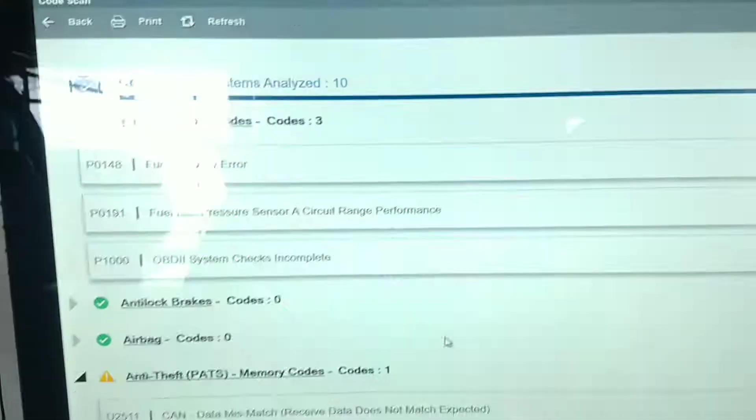What we're working on today is an '08 Ford F-250, big old work truck, and it came in with an MIL, and the customer said it lacks power. You step on it, it just falls on its face. They ran the codes, they come up with these. So what he did is he put in the fuel rail pressure sensor new, and it didn't affect it.

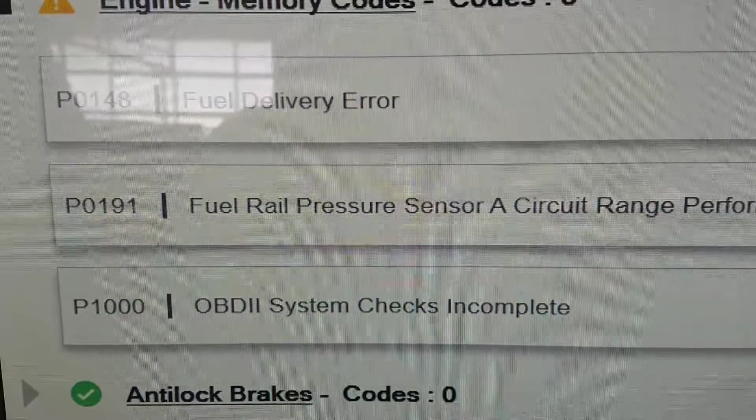Well, I told him there's two other things that it can be on this thing. It has a fuel pump driver module and the fuel pump, one of the two. Since he's already done the rail sensor, either one of them could be a possibility, but I'm leaning towards the driver module. Usually when those go out on these trucks, it just dies. It's dead, and then there's nothing you can do.

But occasionally you get them to where the fuel pump just will not raise its pressure. Instead of having a fuel pressure regulator like they used to, they have a driver module which undulates the voltage up and down, and that's how they regulate the pressure, by reducing voltage to the motor, which years ago, if you did that, you burned up the pump. But somehow that works now.

I think I've only put one of these pumps in. I mean, they very rarely fail anymore. But I put several of these drivers in because on this truck, there it is. Who would think that something mounted out there in the environment like that might give trouble?

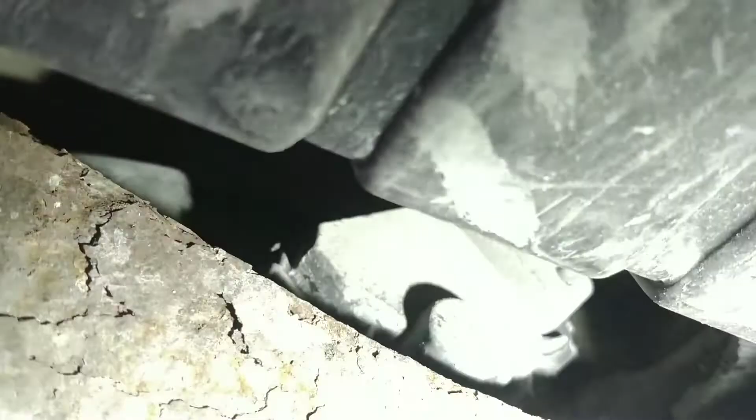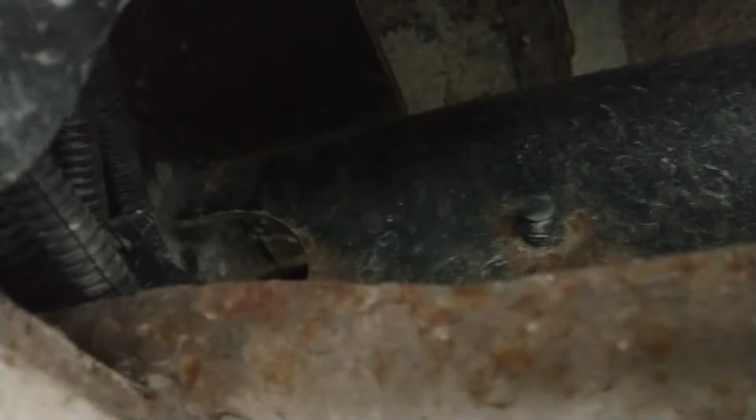Now, on the ones that are just a little bit older, this is an '08, the like '04, '05, '06, they had a bar going across about right here, a round tube, and they had it mounted there, and it would get road salt and junk and stuff underneath of it because the pipe that it was mounted on was round, and it'd pack it in underneath of it, and that stuff would get nasty and everything.

And the aluminum back on that sensor, the junk would build up behind it, and it would start to rust on the metal, it would start to corrode on the aluminum, and it'd just spread out and break the module in half. Have not worked on one like this yet. This will be a first. But I can see back in there, it's still got the aluminum back. It's mounted against steel. I'm going to assume that they have the same trouble.

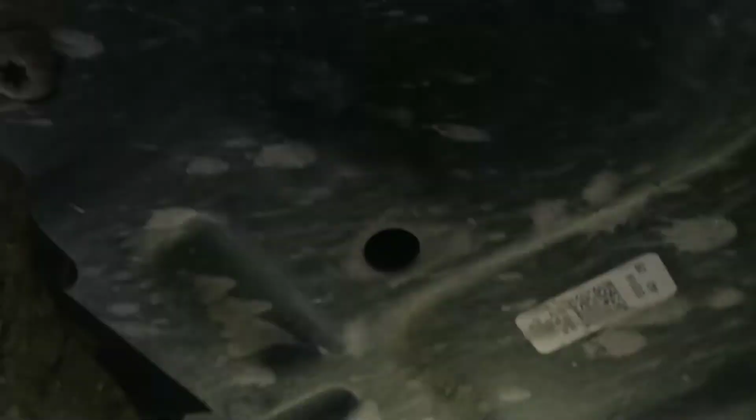Of course, this one has the EVAP canister and everything mounted right in the way. But at least the spare tire is gone. It's mounted on the roof. So we're going to do a little bit of investigation, diagnostic, and get back.

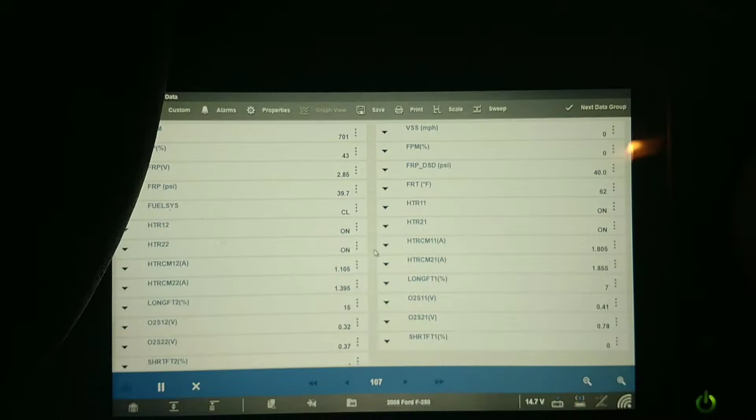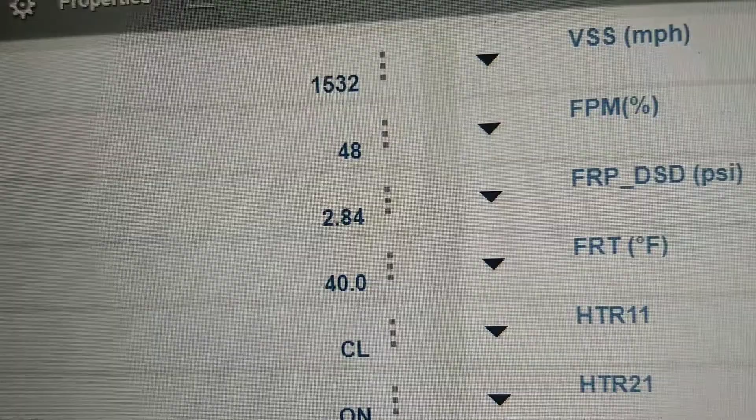Alright, we're in here. Got the data stream loaded up. Right there's the fuel pump rail pressure in PSI. I got it under load right now. I'm going to torque it up a little bit. It is not going up. So we'll see if there's any kind of response out of that module.

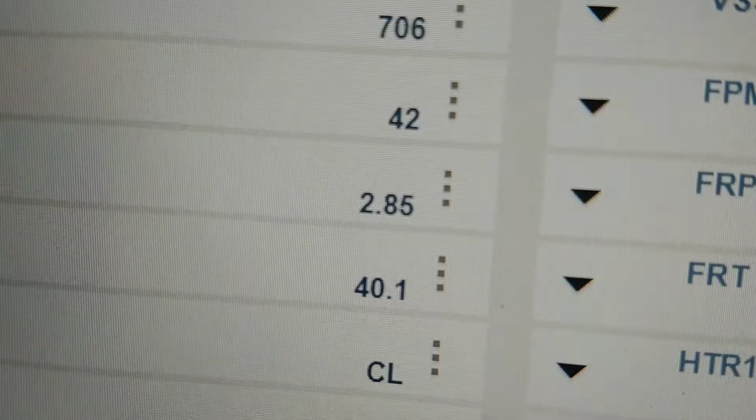Alright. Amazingly, I'm able to get my hand up in there enough to get it unhooked. Go up in here and you can reach over top of the plug-in and depress the deal, and I got my pry bar hooked across the corner here and just sat there and wiggled. I got it slid off a little bit, and I just worked the plug-in off.

Got stuff behind it. It's a tight fit. There we go. And there's enough wire to get it out. All right, now I can see stuff. Get my four eyes here, six eyes, however many. Okay.

I think this wire here is the power wire. And what we're going to do is eliminate the computer. We're going to take the power wire here and jump it to the power wire going to the pump, which should be right next to it, I think. I'm going to double check. I got a picture of it in my phone, so.

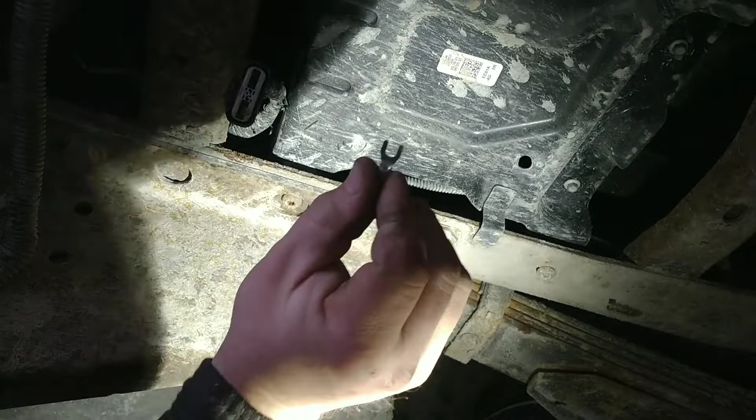But these deals right here are perfect to just plug in and jump them things over. So we'll fire this thing up and see if the fuel pressure maxes out, and take it out and drive it and see if the fuel pressure drops.

Just for reference, I'm going to show you what the fuel pressure did on the test drive the first time. Running along 40, stepped on it a little bit, dropped to 30, let out of it, cruised, and stepped on it hard, dropped down to 18. I'm going to run it around here real quick and see what it does this time. At idle right here, fuel pressure is running about 58, 57.2. Let's put a load on it, see what it does.

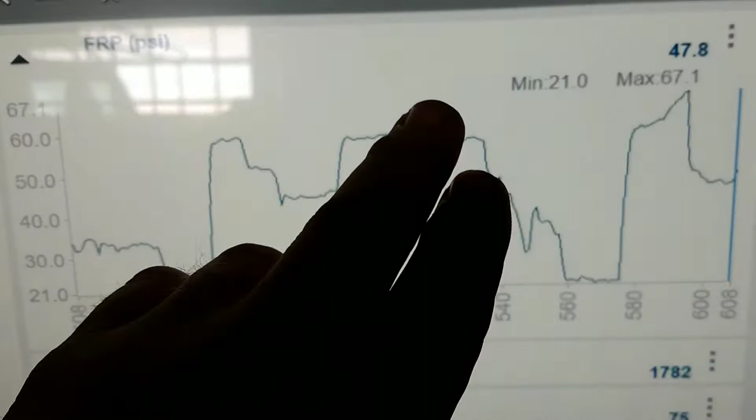All right, I took it out for a second test drive, and I tried to film it, but I guess I hit the button or something. You can see where it started out, and then I just stepped on it, and it just dropped like a rock, down to 20 pounds. Let out of it, pressure went back up, got into it a little bit again, and whenever I'd get into it, it'd just start down nice and gradual. That one's a little bit of a dropout, but it bottomed out there about 20 pounds, 21 pounds. So minimum 21 pounds, maximum 67. So as soon as I let out of it, shot back up.

So what I did back here, completely eliminated computer control, completely eliminated that fuel pump driver module. We got a bad fuel pump. So we'll get that looked up, get the customer called, get her going.